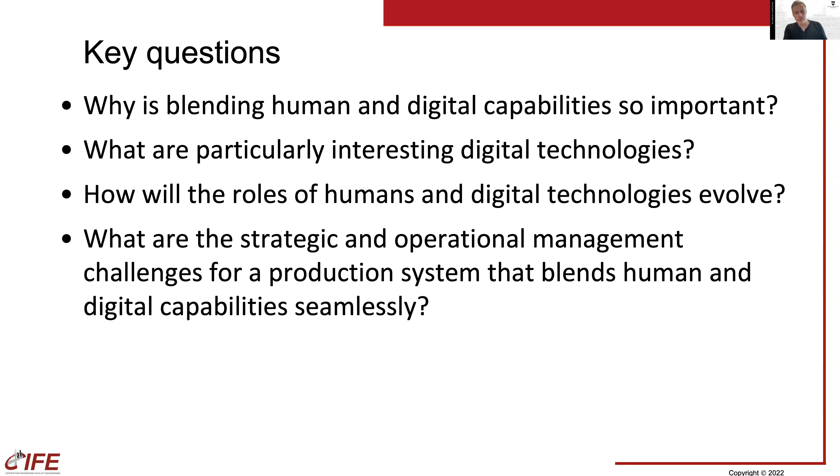Modern construction brings together three main, most impactful trends I think we see in our industry. Industrialization—really thinking about what is bespoke on a project and what can be standardized in terms of product, organization, process; what can be done offsite versus onsite, though it's beyond just onsite/offsite. It also relates to the business model that is possible, enabled, required. That's a big trend we see everywhere in the world, in all sectors of the industry.

Autonomy—we increasingly see machines take agency, take things off our hands. Of course, there are also many challenges with that. Self-driving cars might still take a little while to be fully self-driving, but in building or factory automation, we see certain decisions being made just by the system based on data.

And then the whole field of digitalization, which really enables autonomy and this industrialization, but also addresses other aspects of project production in terms of decision-making that project teams have to make. I'll hopefully illustrate these elements a bit more, and bring them together through illustrations and combinations of those illustrations. But why is this so critical today?

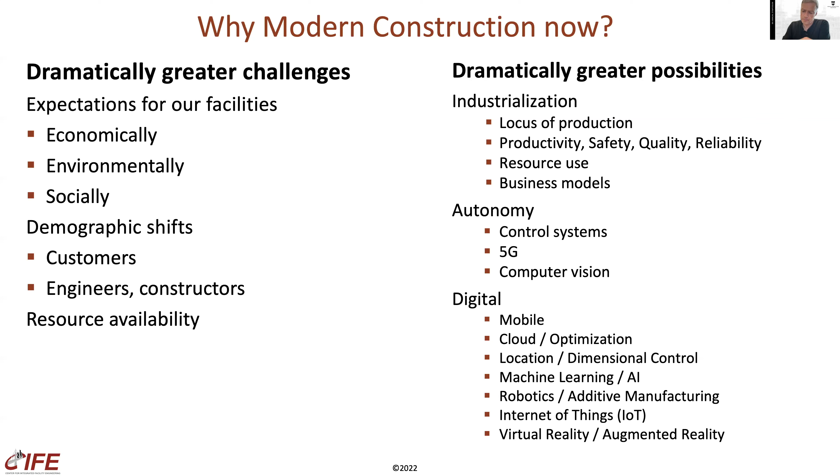So why is this a big deal? I mean, we are building projects today, but consider a few performance criteria here.

Cost, right? When digital tools cost you cents per hour versus many, many dollars per hour. And I understand an hour in a computer is not the same as an hour by a person, but when you have a person do something that could be done by a computer, that is a problem, looking at just the cost difference.

Speed, we see typically when you digitize something, 10x or even more, 100x faster execution, opening up a whole world of possibilities in terms of feedback loops, exploring options, and so on.

Consistency, I don't know how else other than through a mix of industrialization, digitalization, and autonomy, we will get to something close to 6 Sigma, or even 2 Sigma performance on our projects. That would already be quite amazing if you got to 2 Sigma. But I don't know how else to create highly consistent, reliable performance.

And the same with scalability. Purely human practices scale very slowly and imperfectly, I think we all know that. And when we couple digital and human capabilities, we have a much better chance of actually scaling good practices.

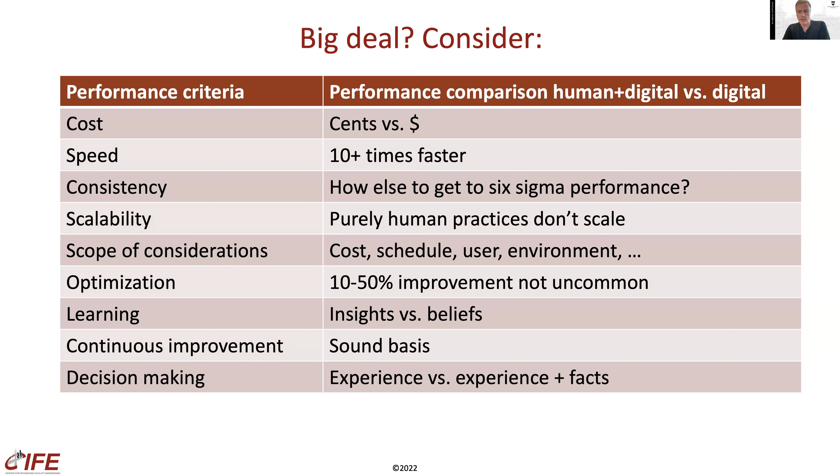And then decision making, do we just rely on experience, or experience and facts? I would rather rely on experience and facts, but then we have to create them. That would actually be a good metric on a project: how many decisions have you made just on the basis of experience, and how many on the basis of facts?

So let me give some examples of different digital technologies. I won't be able to do the many digital technologies justice, but just to illustrate that. And then I'll share a framework that hopefully is helpful for you to manage this combination of digital, physical, and human capabilities.

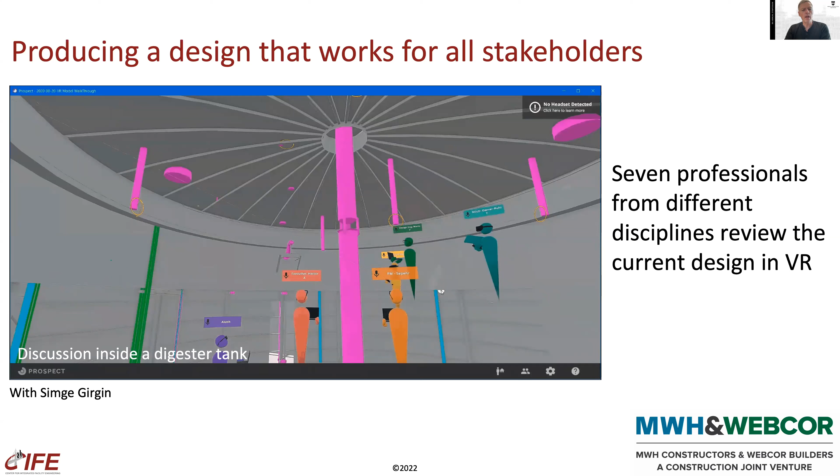So in this case, 7 professionals did a design review of a digester tank for a wastewater treatment plant in San Francisco in virtual reality. The digital environment really helped bring the professionals together, gave them a shared experience, and allowed the team to produce a design that works for all the stakeholders in a much more rapid way than in a typical handoff kind of process that we see, unfortunately, too often.

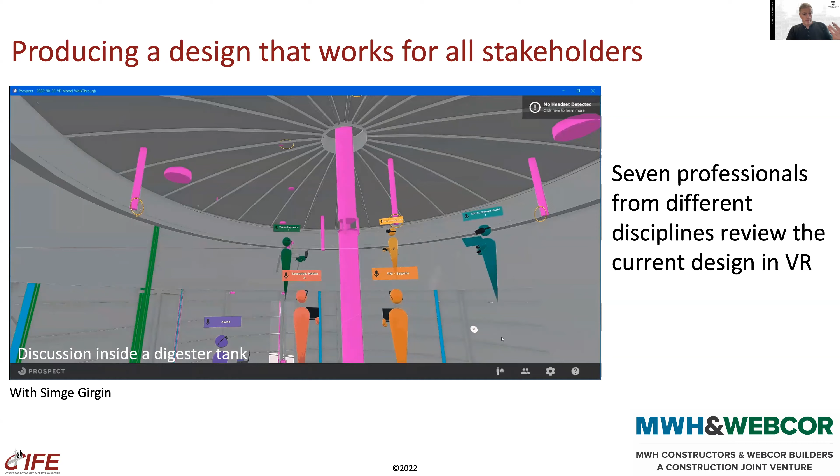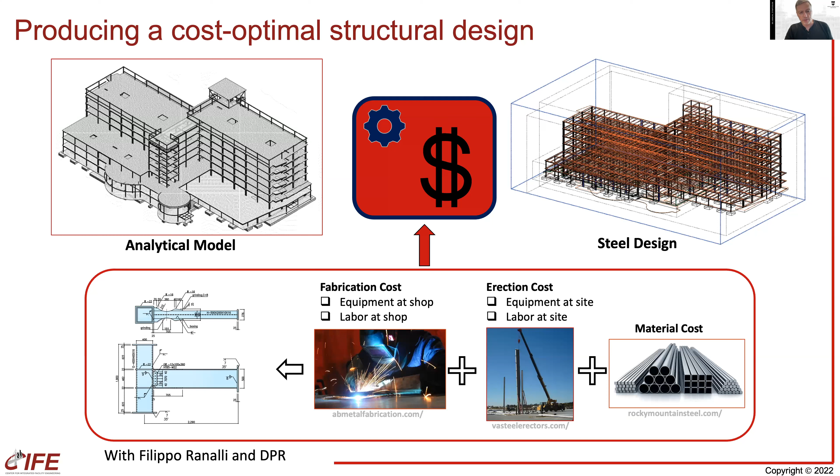And when we applied this to a project much more complex than the one shown in the picture - for non-disclosure agreement reasons, we can't show the actual project - we saw that the integrated and optimized, concurrent way of producing this structural design led to a structural design that was 10% more cost effective.

And you can see that pretty much all of the savings are coming from the details. When you contrast this with a sequential process, you will probably not have access to those savings that come from the details, because you've probably locked in the overall big stuff that makes up the structural system in the early design stages.

And you might have been lucky and picked exactly the right components that lead to an efficient production process, but you might not have. In this particular project, they were not totally lucky, and there was an opportunity to save 10% basically in the detail.

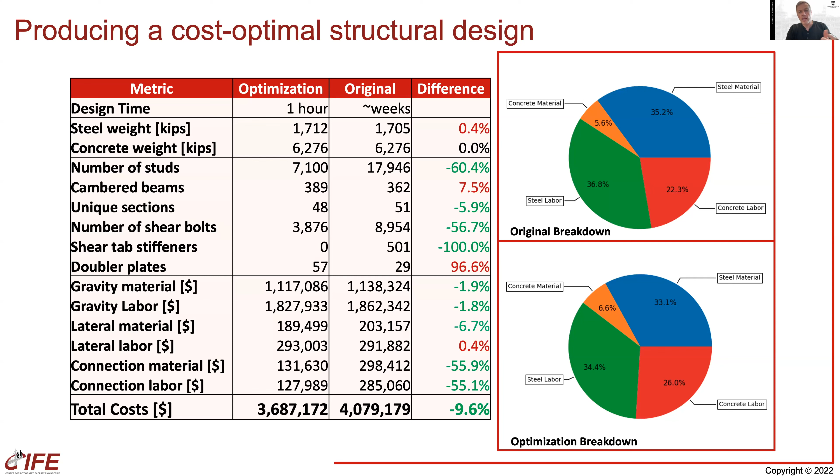So by making the design concurrent, the detailed and the conceptual design concurrent, and analyzing many, many options, we can produce a cost optimal structural design, or producing the best strategy, construction strategy.

Similarly, the company, in this case Clark Pacific, wanted to know from the beginning of the project what is the best construction strategy. And best, I put it in quotation marks, because there's duration, cost, idle time, resource utilization, consistency of that, and so on.

But again, similarly to the structural design option, it was a matter of very rapidly and consistently iterating on these construction strategies and trying different ideas, so that over the course of 3 days, these two professionals could come up with the best construction strategy for this project.

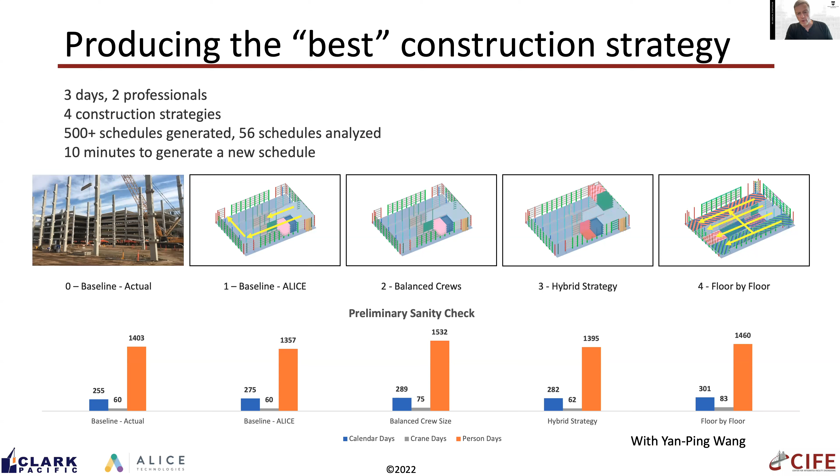In terms of producing a reliable construction process, a technology that has been out now for a couple of years is Versatile, but there's other methods that allow you to very rapidly and consistently document what goes on a construction project.

Here you learn what the crane is doing every second, and this allows you to really understand the variability in installation cycle times. Here, for example, for the shear walls on the parking structure, and this is actually quite surprising to me, we see a variability of 23.5 minutes for the fastest and 111 minutes for the slowest.

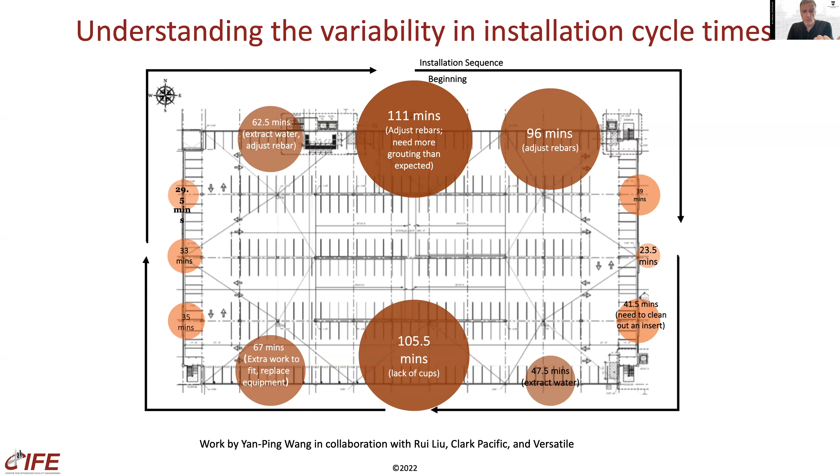So many of you have probably played the dice game, where you sometimes may wonder, like, 1 to 6, that's a huge variability. Well, that's actually what we see here in practice. But learning what the variability actually is, is obviously a key part, and then creating a much more reliable production process, either through reducing the variability or finding the appropriate ways of buffering.

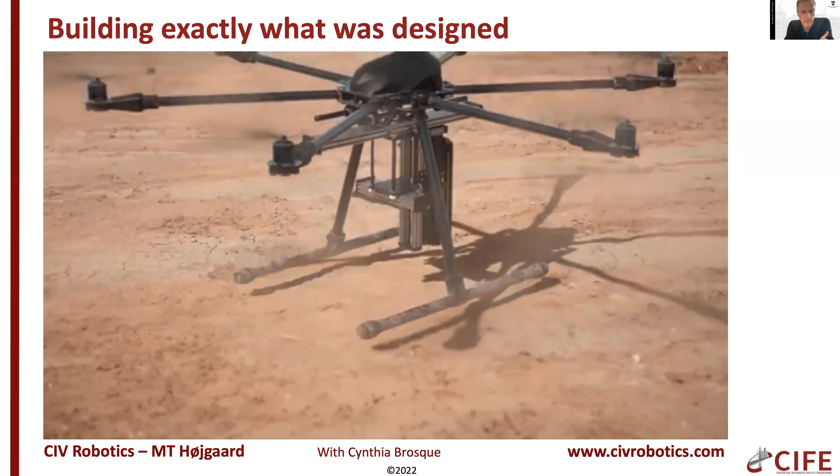Or building exactly what was designed. One way of this, for a solar farm, is fully autonomous layout of where the foundations for the different solar panels go. And so this drone flies around and basically does all of the layout automatically.

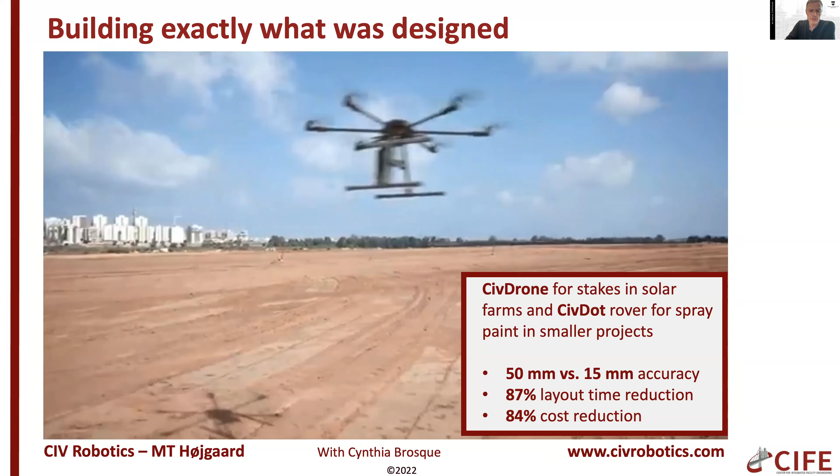And then so when we compared this with the traditional layout method, we saw significantly improved accuracy and dramatic time and cost reduction.

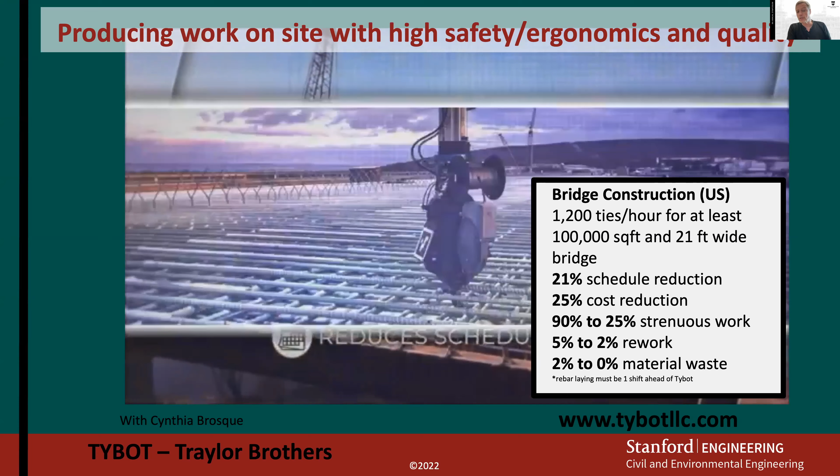In terms of actually producing work, a rebar tying robot for bridges is able to tie 1,200 ties per hour. That's slightly more than I did when I was a rebar layer. And again, we're seeing a significant improvement in safety, in particular ergonomics of the work, a reduction in rework, material waste, and still quite a significant schedule and cost reduction.

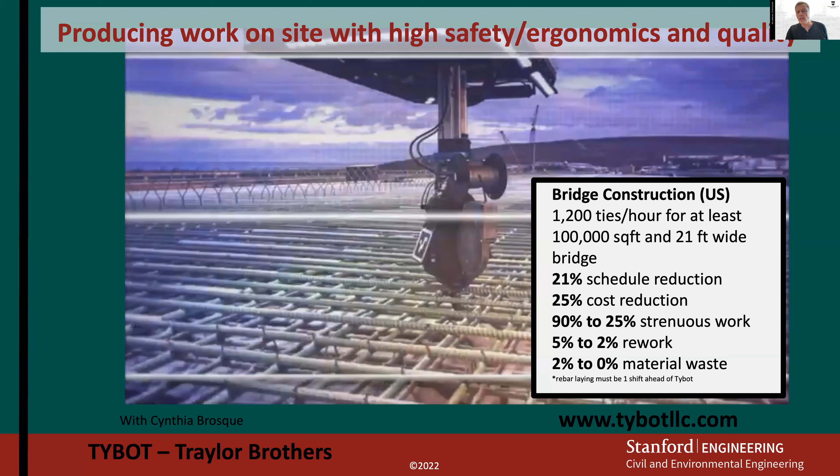So these are just very quick vignettes of some of the digital technologies that I mentioned at the beginning, and we are using them. We see around the world, everybody using several of them.

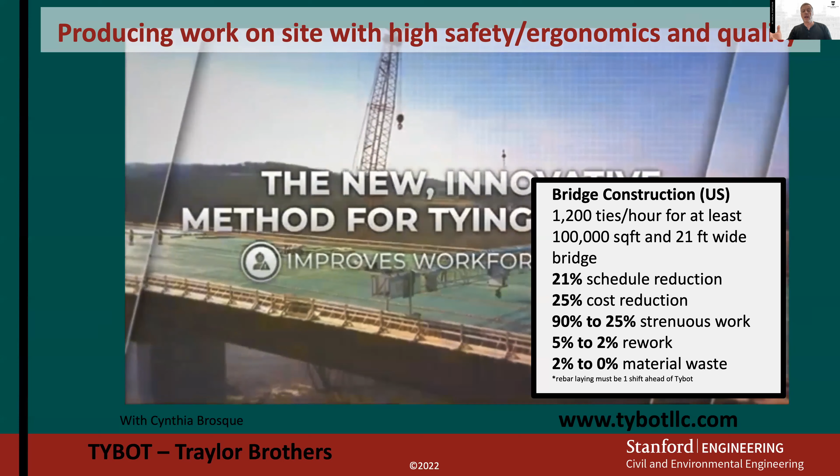And I think now the challenge is to scale that use, but also then to really put all of this combination of digital and human capabilities together. And to do that, we reflected -- and I should have highlighted on each slide, but the credits are there -- on the work of the students that helped do that work.

And together with Ashwin Agrawal, we put a framework together that at least I found quite helpful in thinking about this. Because if you think about any kind of production process, you need some data that you need to observe in some way. You need to typically analyze, predict a few things. You need to make decisions, and then you need to execute actions.

And so in terms of that, we need to decide who does that and for what kind of task. So we could imagine at one end of the spectrum, a fully autonomous, automated way of doing things -- the machine takes care of all of it. And then at the other end of the spectrum, we might have basically just a human doing things. That's sort of the baseline at the bottom.

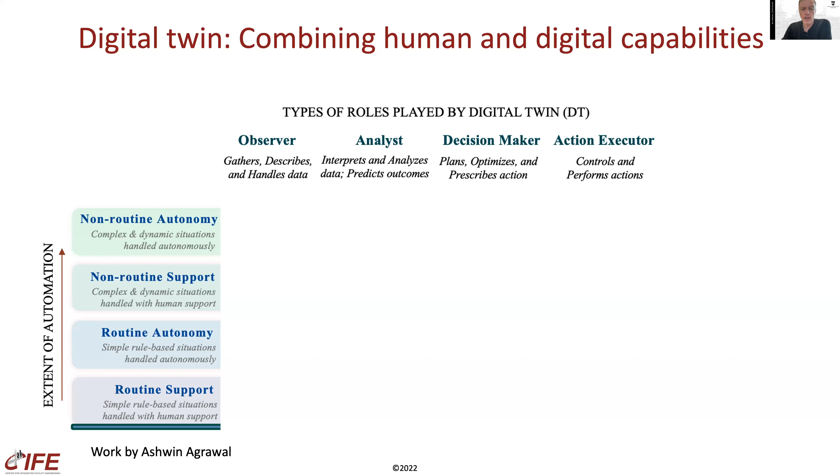And then increasingly, you could say, well, there could be support of digital methods for routine types of work. There could be routine autonomy. There could be support for non-routine work. And then there could be systems where the digital methods, the machines, can handle anything.

So if we map the examples that I shared onto this framework, we see that, for example, the data collection system for the crane collects data basically autonomously, and I think only in some very non-routine situations does the human need to look at what's going on and add to the data. But most of the data is observed, collected, pretty much autonomously.

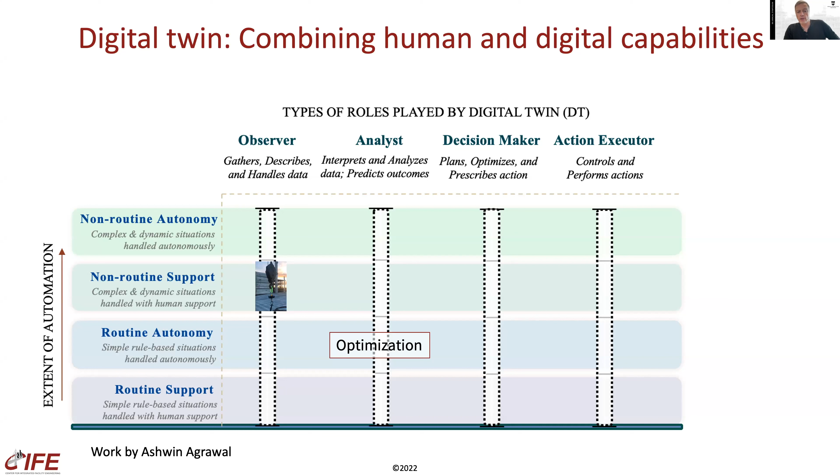In terms of the analyst role and the optimization examples, the optimization methods can handle sort of standard buildings, construction schedules. So extremely unique situations, probably not yet. That's why I put it there in terms of providing routine autonomy.

The virtual reality method basically provided support for decision making for a team of people, so in that sense a bit lower level in terms of what the digital twin is doing. In terms of the autonomous or action executor, the drone really handles all of the layout and all routine situations, actually providing support for non-routine situations. The rebar tying robot handles routine situations very well, but non-routine, complex rebar designs etc., humans still have to do.

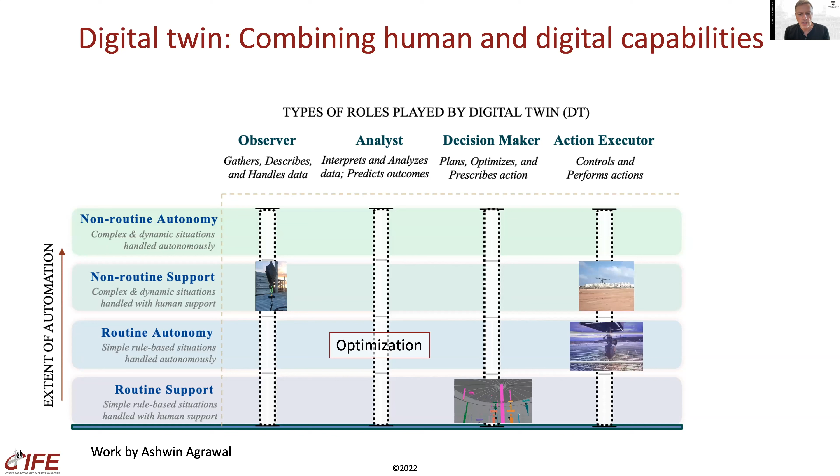So if we generalize this, the challenge and opportunity you have in your companies is to decide, for these types of production tasks, in terms of gathering and observing data, making sense of the data, using it to make predictions, making decisions, and then actually executing the action for a particular situation - how much does the machine do and how much does the human do? And therefore, how do you combine the digital and human capabilities?

In this particular example, the line shows that data is collected automatically with some support of humans, but humans still have the major role in actually collecting the data. Once the data is collected, routine situations can be analyzed automatically, and decisions suggested automatically, but then the implementation, the action, is left to the humans. The human is handling all of the non-routine situations in terms of analysis and decision-making, and also quite a bit of the data collection.

Then you could use that and say, well, this is what we have today. And then you could decide strategically: how do we want to change this? Do we want to create some level of autonomy in the execution? Do we want to be able to analyze non-routine situations? Is it important that we gather data more automatically?

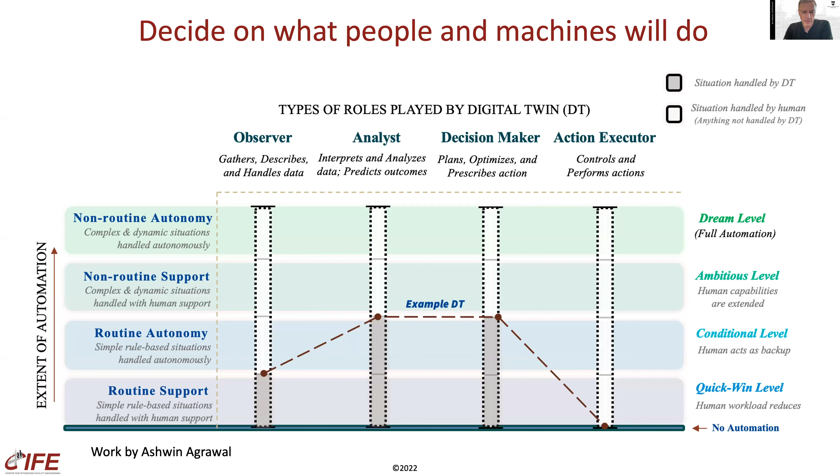That's, in my mind, how you can connect this blending of digital and human capabilities with your operational and strategic decisions. Because on the operation side, you have to make sure that this blending of human and digital capabilities is working really well and consistently from project to project. Otherwise, we know what our project teams will do with the tools.

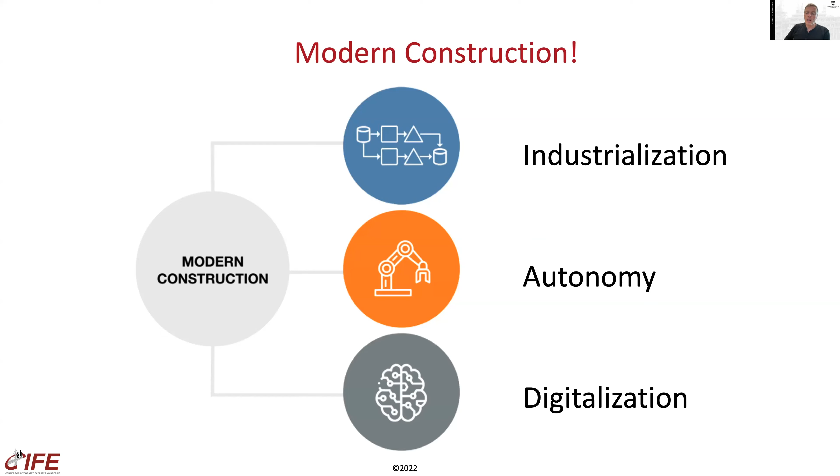So I hope these examples and reflections have explained to you the opportunity we have with modern construction by really combining digitalization and autonomy and industrialization, so that we can optimally combine human and digital capabilities in our project production system, because I would say we can, but we also have to.

Thanks for listening.

All right, thank you Martin. That was a lot to think about there. Before we move on and invite our other guests for the panel, I want to give you a 30-second plug on the partnership that we have with you around some education around these things. So maybe you could just talk about that briefly.